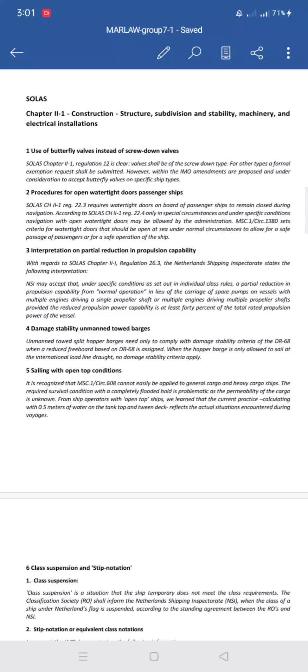Good day, sir. I am the representative of group number 7, and this is our outline presentation about SOLAS chapter II-1. So, SOLAS chapter II-1: construction, structure, subdivision and stability, machinery and electrical installations.

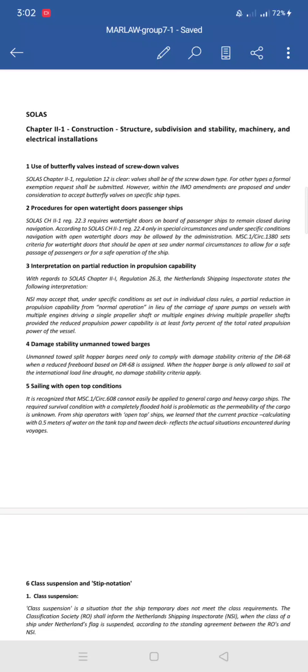Number 1 is use of butterfly valves instead of screw-down valves. SOLAS chapter II-1 Regulation 12 is clear: valves shall be of the screw-down type. For other types, formal exemption requests shall be submitted. However, within the IMO amendments are proposed and under consideration to accept butterfly valves on specific ship types.

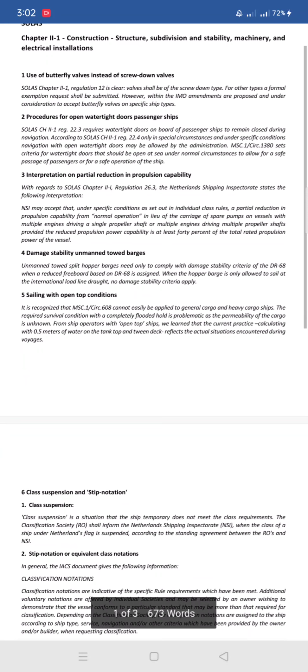Number 2 is procedures for open watertight doors on passenger ships. SOLAS Chapter II-1 Regulation 22.3 requires watertight doors on board of passenger ships to remain closed during navigation. According to SOLAS Chapter II-1 Regulation 22.4, only in special circumstances and under specific conditions, navigation with open watertight doors may be allowed by the administration.

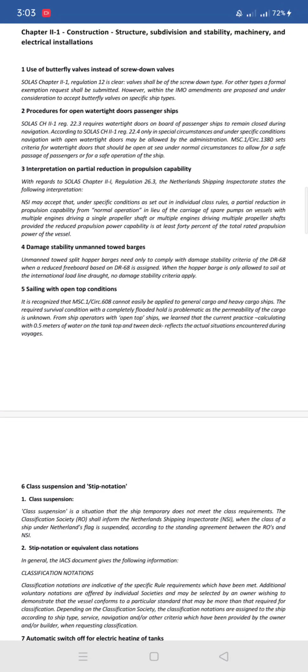MSC.1/Circular 1380 sets criteria for watertight doors that should be open at sea under normal circumstances to allow for a safe passage of passengers or for a safe operation of the ship.

Number 3 is interpretation on partial reduction in propulsion capability. With regards to SOLAS Chapter II-1, Regulation 26.3, the Netherlands Shipping Inspectorate states the following interpretation.

NSI may accept, under specific conditions as set out in individual class rules, a partial reduction in propulsion capability from normal operation in lieu of the carriage of spare pumps on vessels with multiple engines driving a single propeller shaft or multiple engines driving multiple propeller shafts, provided the reduced propulsion power capability is at least 40% of the total rated propulsion power of the vessel.

Number 4 is damage stability of unmanned towed barges. Unmanned towed split hopper barges need only to comply with damage stability criteria of the DR68 when a reduced freeboard based on DR68 is assigned. When the hopper barge is only allowed to sail at the international load line draft, no damage stability criteria apply.

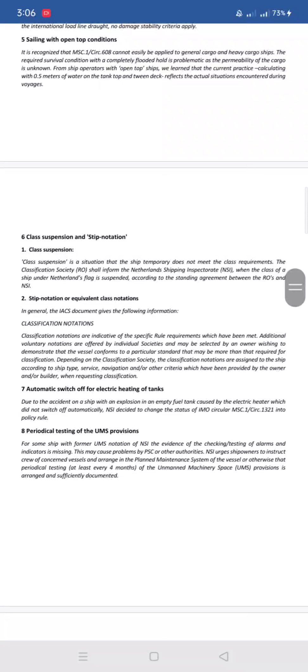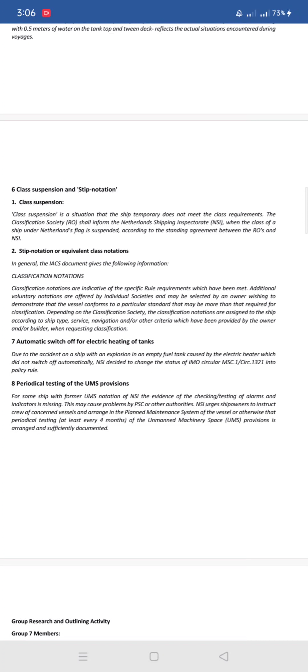Number 6 is class suspension and Stip-notation. Number 1 is class suspension. Class suspension is a situation where the ship temporarily does not meet the class requirements. The Classification Society (RO) shall inform the Netherlands Shipping Inspectorate (NSI) when the class of a ship under Netherlands flag is suspended, according to the standing agreement between the ROs and NSI.

Number two is Stip-notation or equivalent class notations. In general, the IACS document gives the following information. Classification notations are indicative of the specific rule requirements which have been met. Additional voluntary notations are offered by individual societies and may be selected by an owner wishing to demonstrate the vessel conforms to a particular standard that may be more than that required for classification.

Depending on the classification society, the classification notations are assigned to the ship according to the ship type, service, navigation, and/or other criteria which have been provided by the owner and/or builder when requesting classification.

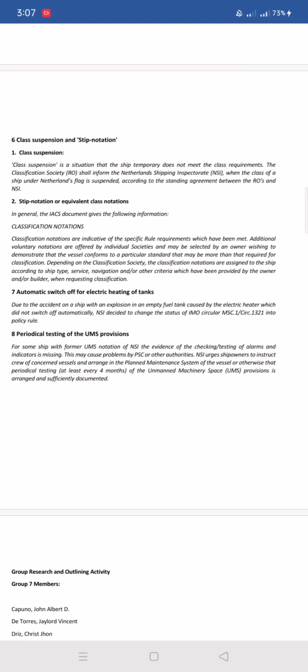Number 7 is automatic switch-off for electric heating of tanks. Due to an accident on a ship with an explosion in an empty fuel tank caused by an electric heater which did not switch off automatically, NSI decided to change the status of IMO Circular MSC.1/Circular 1321 into a policy rule.

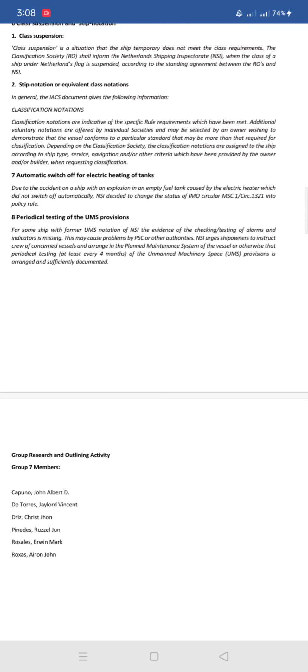Number 8 is periodical testing of the UMS provisions. For some ships with former UMS notation of NSI, the evidence of the checking and testing of alarms and indicators is missing. This may cause problems with PSC or other authorities. NSI urged ship owners to instruct crew of concerned vessels and arrange in the planned maintenance system of the vessel or otherwise that periodical testing at least every 4 months of the unmanned machinery space UMS provisions is arranged and sufficiently documented.